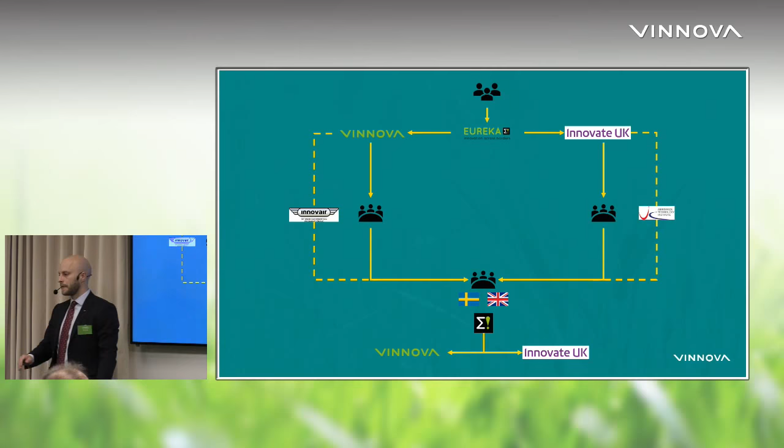So on the Innovate UK side, once you've completed and been through Eureka label, there is nothing further in terms of application to do with us. The independent assessment will be done on the Eureka application form only. The extra documentation the UK is asking for is purely for the strategic assessment by ATI, and there's a line not shown here which is value for money, assessed by our sponsoring department, the Department for Business, Energy and Industrial Strategy, BEIS.

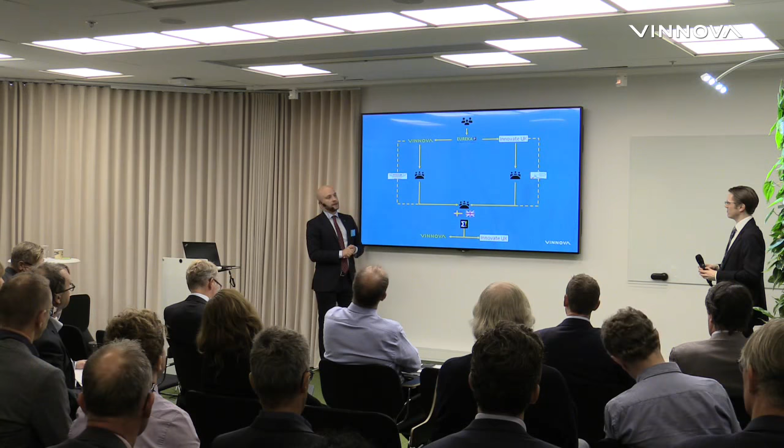Yes, so for Vinnova there's an extra step after the labeling. That's when you have to register and do the application to Sweden. But that's basically just submitting the Eureka project proposal, and then we will deal with it over here.

Here's another slide with the same information. Worth noting is that we will use the Eureka methodology for assessing the applications, so we will use the same method on both the Swedish side and the UK expert panels.

And the question you've been wondering: what is a Eureka label? It basically means that we bring the applications that have come out of this process to the Eureka high level group, and they will endorse these projects. That's the way it works.

Crystal clear. There was a lot of information, and I'm sure we will find a way to put the slides on the web pages for those of you who couldn't follow all the details. But I also heard there is a 1.5 hour YouTube clip of Justin explaining everything, and I expect Lars and Peter will do the same recording in Swedish. One day, I'm very much looking forward to that.

I think we hope we have time for some questions here of a more general character that could also be interesting for the people watching on our web broadcast. Then we will have a 5 or maybe 10 minute break to get some fresh air, change the technology for the presentations from the companies after this, and we will continue. But are there any more questions so far?

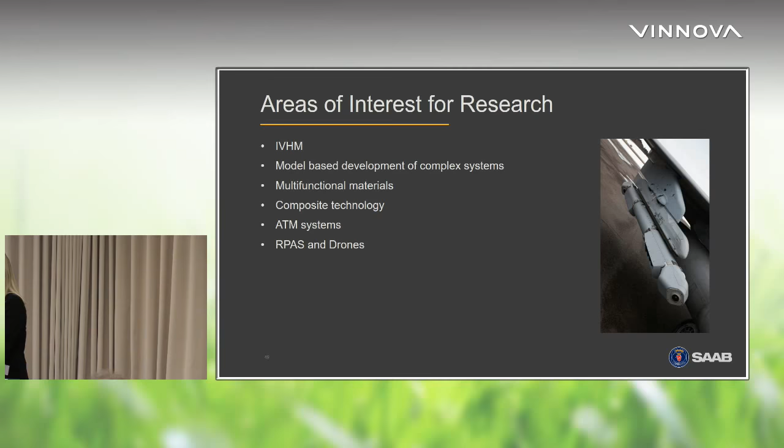I have a favorite expression when I talk about innovation: R&D is taking money and turning it into knowledge, and innovation is taking knowledge and turning it into business. So what I hope for this call and the activities we're doing today is that we'll come up with really interesting new technology, but also take it to other applications.

I also hope this might spin off—we talked about Saab the car, we talked about spin-offs earlier. But also maybe it can encourage some STEM research and some of our younger teenagers to be excited about aeronautics, because personally I'm quite excited about aeronautics. So that was a bit of it.

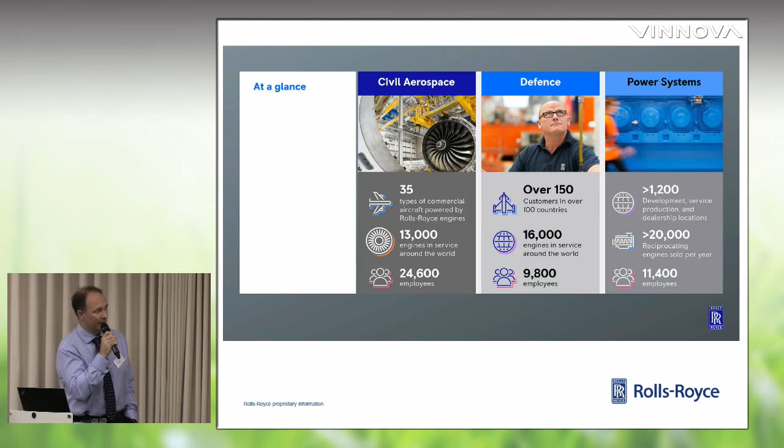And then in the defence markets, we have over 150 customers, significant numbers of in-service engines, and also just under 10,000 employees. Our power systems division equally has a significant footprint as well.

So civil aerospace is our biggest business, just over half our turnover there, at just over £6 billion. It's huge, as you can see, this big engine being tested. This is our lifeblood of where I come from in Derby. It's a significant investment in the region, as well as other investments around the UK and globally.

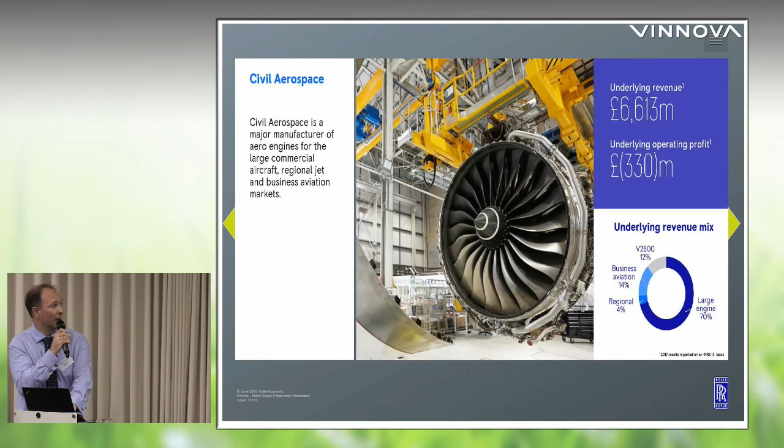In defence, we also have significant investment, and also in power systems as well. So we have around 50,000 employees globally, and around just over a third of those employees are engineers. So we heavily support our engineering development within our company.

We heavily support the education of engineers globally as well. We have significant numbers of apprenticeships, 750 apprenticeship schemes. And we're really keen to get out there into our various communities to support engineering and develop the engineers of the future as well. We have operations in over 50 countries globally.

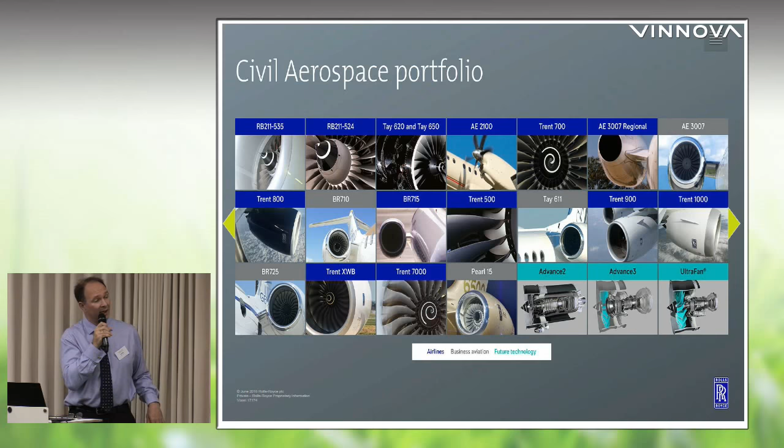We have an approach to technology we call our vision approach, where we look at technologies in the next 5 years and then the next 10 years. The next 5 years would be some of the technologies I just mentioned in terms of the Ultrafan. The next 10 years would be things in terms of the initial electrification market. In the next 20 years, even more radical ideas, like the plane design at the end, the blended wing, as we call it.

So these are some of the technology portfolio areas we are supporting in terms of architecture and design. We're looking at technologies that advance our core for emissions, which is key in the aerospace industry as we increase the number of aircraft in service and the fuel burn. We've got to look at better solutions that reduce fuel burn, particulates, NOx and CO2. So we've got projects working on lean burn. I've mentioned Ultrafan already. We're looking at how we do some of our digital design in the virtual engine, and we also have technologies around our engine core as well.

We work quite closely with our catapult centres in terms of manufacture, in terms of advancing general manufacture as well. We're also involved in ALM, and in specialist turbine manufacture to improve our capability in our hot core. To do some of this, we have a very large materials department, and we work with lots of academics and our catapult centres in terms of advancing the alloys we require and new varieties of those alloys required in our engine design.

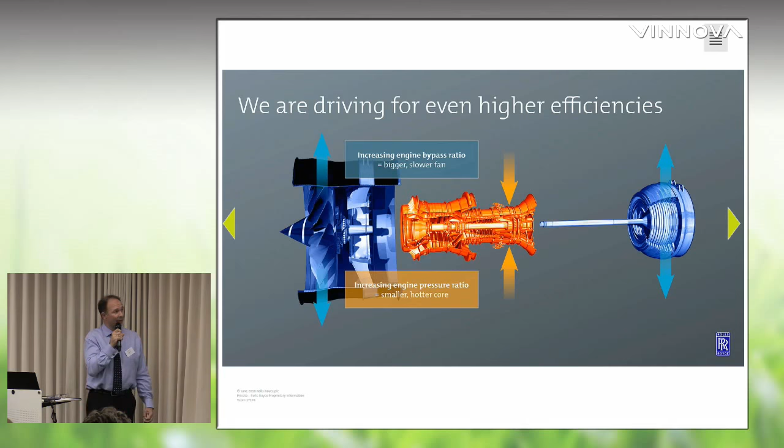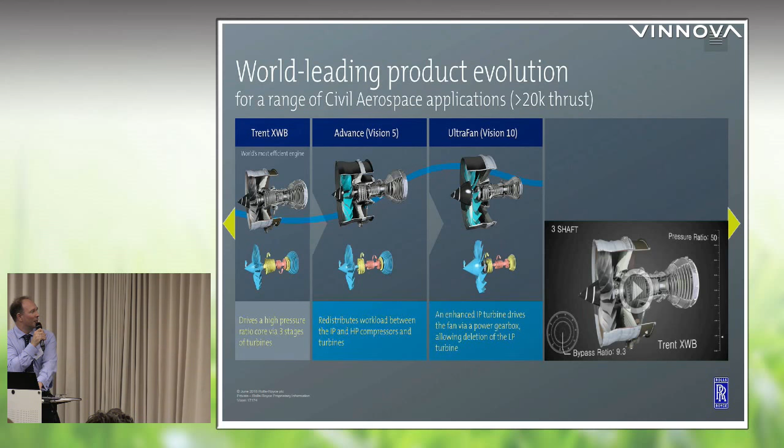This is just really reiterating what I've said, so I'm going to quickly skip on for the purposes of time. I've already talked about our evolution from 5 to 10 years.

In terms of where we're located, in a number of areas around the world, also with our network of partner organisations. This is why it's really key today, and I'm really pleased to see so many of you here today. We can't do all this on our own. We need partners, and so we're always keen to look at who we can actually partner with.

We were quite lucky to set up a concept that we call our UTCs, our University Technology Centres. We have around 19 in the UK, but also global locations. These are great because some organisations have direct educational centres, and we found that linking with key universities has been really beneficial in terms of their specialist expertise. We almost certainly partner with some of these organisations in a lot of our technology projects.

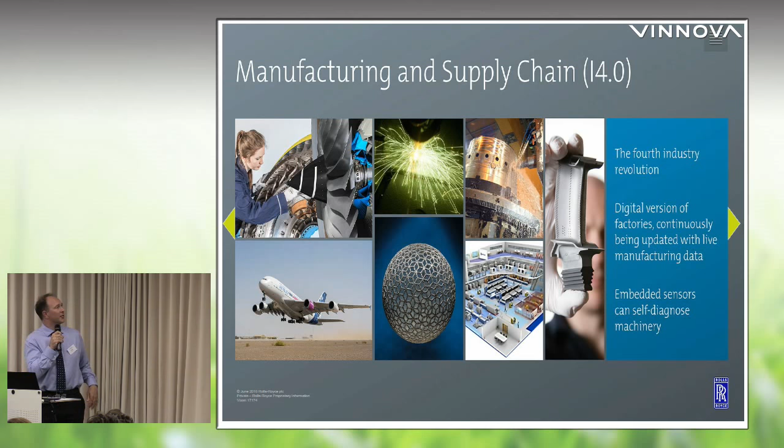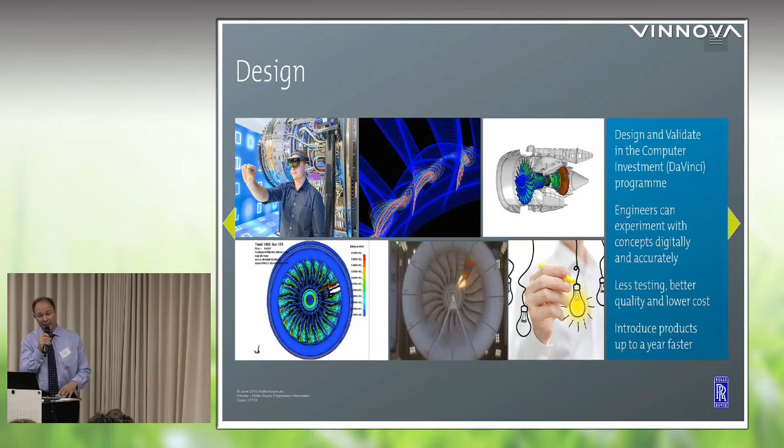Most of you will have heard of Industry 4.0, so this is part of the digital linkage into our manufacturing and supply chain. We're also key in terms of looking at high value design, and we have various departments both in the UK and Germany particularly, where we're looking at improving the way we design engines in a digital capacity. There are lots of techniques and a number of projects supported from various institutes at the moment.

Moving on to some of the last slides, this is our evolution of propulsion. Today we have in service the Trent XWB on the A350 as our current in-service engine. We are testing currently our advanced engine, and then we're moving into our UltraFan engine with its biggest ever diameter and power gearbox. We'll then be looking at a variable pitch UltraFan to even improve the efficiency. And as we start going into the future, we've started engaging on hybrid electric engines as well, to look at fuel efficiencies in terms of acceleration and deceleration of aircraft during flight.

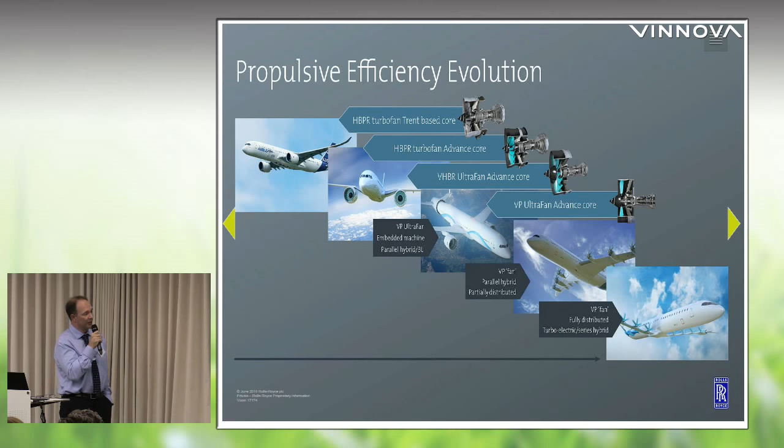And then as we get to full electric opportunities, you can see the model at the end. These are some of the things we're looking at, and I mentioned that we're also interested in doing some full electric test flights for limited numbers of passengers at the moment. So we have a lot of technology that's going forward into the future.

So through this call, what are we looking to do? We really wish to collaborate. We cannot do all this on our own, and our drive is to work with not just national but global organisations, both at our catapult centres, universities, SMEs, and other industrial organisations. Today we work with all those organisations. In terms of our linkage to Sweden, we're quite heavily partnered with GKN on our UltraFan programme.

We also have other collaborations that exist today, and I've given a couple of examples. We work with Chalmers University of Technology and have done some work with them in fuel pumping. We're also involved, when you get down to the smaller elements of our control system, in harsh environment electronics with a company called Ascatron. So we're keen to look for many opportunities that exist here in Sweden, and looking for collaborative opportunities that can help us on our technology journey.

I think that's all I have.

Okay, thank you very much, and thanks for that, Greg. Thank you for coming here to Stockholm and telling us about your visions. I really hope you will find some new opportunities through this call and more collaborations with Sweden. I'm sure there are lots of companies and researchers keen on working together with you and Rolls-Royce in developing this. And I think electric aircraft is visionary too - be interesting to see, that's really in the future.

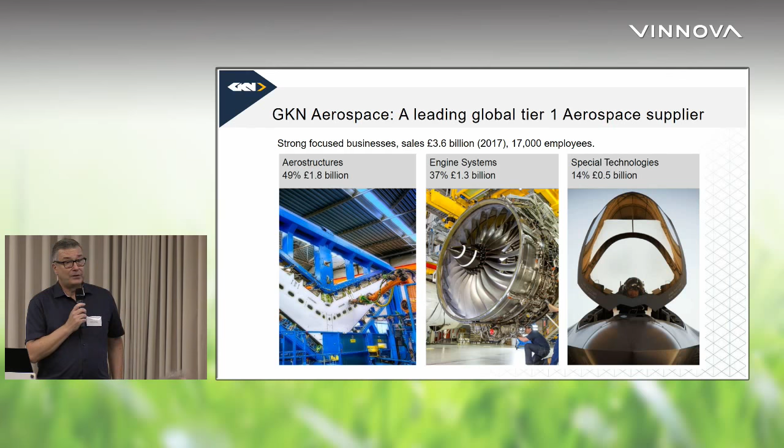So I'll talk about the engine systems division then first, or mainly for all of my presentation today. The headquarters of the global engine systems division is in Trollhättan, Sweden. We have 12 different sites in exotic locations such as India and Norway, but the majority of the sites are in the US. About 2,400 employees in Sweden, and maybe some people remember that way back in history, before 2012, we were called Volvo Aero, and before that Volvo Flygmotor and other things from way back to the 1930s.

We are active in the military area. We are, in fact, OEM responsible for the RM12 engine for the current Gripen aircraft. We also have a space propulsion division developing supersonic turbines driving the fuel pump for the Ariane rocket, and also the exhaust nozzle for the big main engine. But I'll talk mainly about the civil side today, the commercial engine side.

And the nice picture you see there, it's not actually a GKN engine. We don't have our own civil engines, but it's not a marketing cartoon - it's actually a virtual engine printout. So thanks to our heritage and whole engine competence from the military side, we can actually do a full engine model and use that as a virtual engine to assess all the technologies we develop. So it's a good example of synergies between the military and civil side.

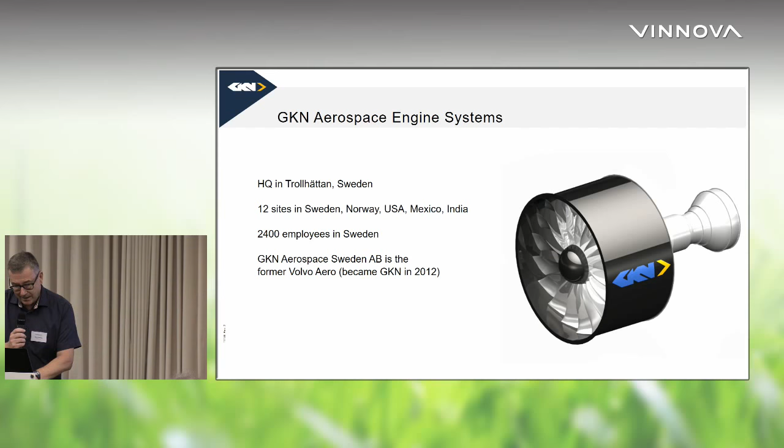We have a strategy, or a component specialization or module specialization if you want, working on four distinct areas of the aero engine: rotating parts in the fan, static parts in the fan, the low pressure compressor or booster, and static parts near the exit of the engine. We call this our 4-module strategy.

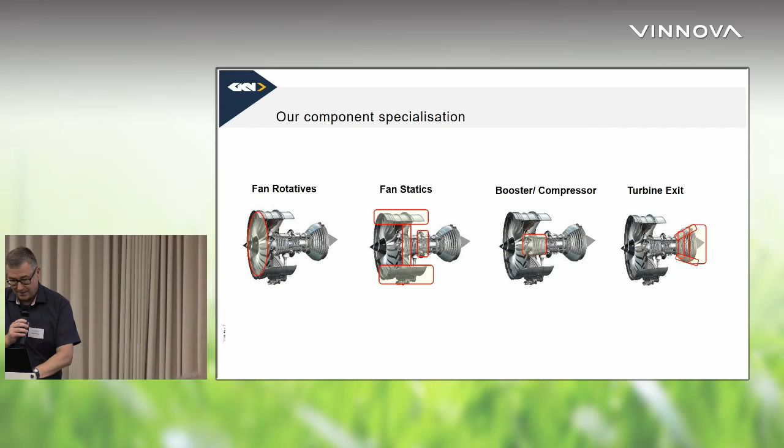It's been quite a successful strategy because we have been able to do business with all the engine OEMs. So today we are involved in more than 90% of all large commercial engines worldwide, not only with Rolls-Royce but with some of the competitors as well. But that means that we can be efficient for companies like Rolls-Royce, having bigger volumes and so on.

Looking at Rolls-Royce, I've just taken some examples of engine programs where we are partners, like typically around the part called the intermediate compressor case, which is a very complex structural part sitting in the middle of the engine. It interfaces with absolutely everyone, so we have to be very flexible, like Swedish people normally are, and talk to everyone.

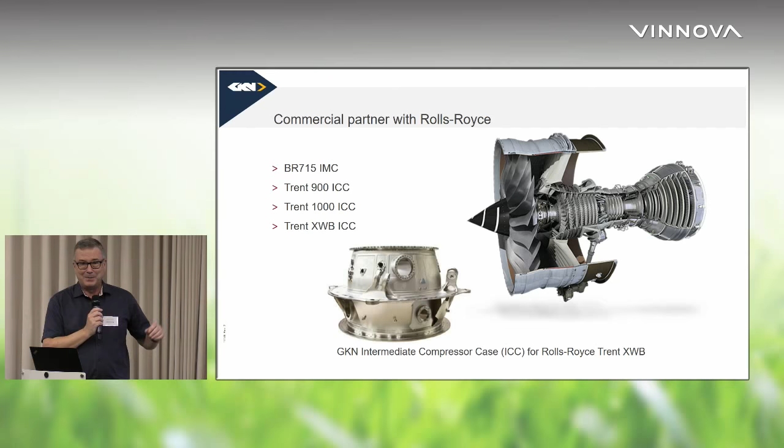As Greg said, we are also partnering in the UltraFan demonstrator in Clean Sky. So we are what's called a core partner in Clean Sky 2, which means that we are a strategic partner from day one to the end of the project.

Also in Clean Sky, it's not only with Rolls-Royce, we are also on some other engines. And as a core partner, we can also launch our own calls for proposals to bring in new partners, which we have done with several UK partners, in fact, by chance, because it's a free competition. But they are good.

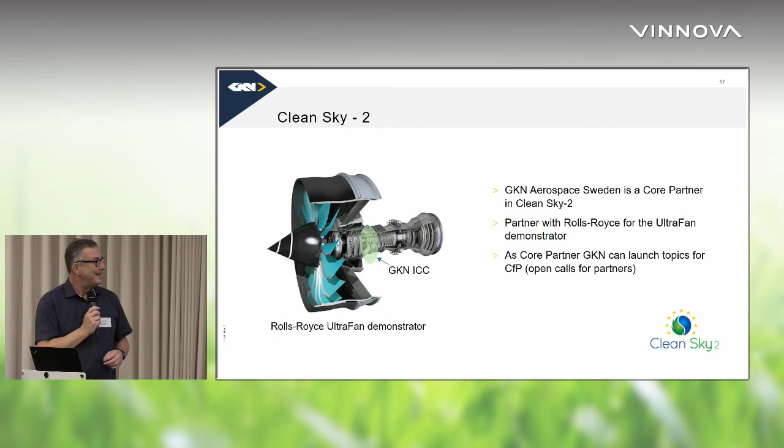So I wanted to mention a couple of other entities in the UK that we are working with or have been working with. Just examples, not an exhaustive list, but we work with universities such as Loughborough and Oxford University, Nottingham, the Catapult Centres, AMRC in Sheffield, MTC in Coventry, the Welding Institute. I'm not sure if that's a Catapult, but maybe not, but it's good anyway.

So what do we want to do in the call? Well, we hope to be able to expand our collaboration with Rolls-Royce. We really like to work more with the Catapult Centres and also the highly skilled universities. Some of them are centres of excellence for Rolls-Royce, I think, as well.

But not only these, we also have supply chain companies in the UK, our supply chain, where we can get things like fiber fabrics for composites, castings, forgings, new alloys. So we are trying to set up some collaboration in that area as well, and looking also at SMEs.

And on the Swedish side, we want to involve what I wrote as Swerea Research - maybe you're called RISE Research Institutes now, I don't know - but at least we want to work with the research institutes in these projects, and also bring along some of our university partners like Chalmers, University West, KTH, Luleå.

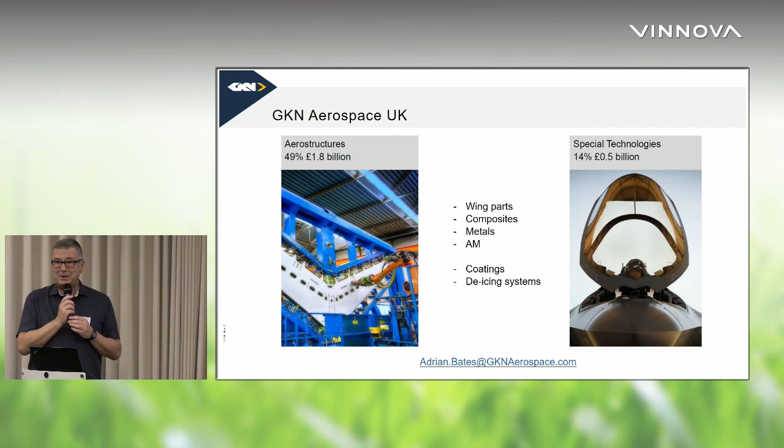On the special technology side, there are things like smart coatings in facility in Luton, de-icing systems. So if you want to be in contact with them, send an email to me or Adrian Bates and see what we can come up with. Okay, thank you.

Thank you, Robert, and great that you could present both GKN UK and Sweden. And as we said, GKN is an important partner in this call, and as Justin and Lars explained, you count as a company partner, and there's this little bit special rule: you can't have a project with just GKN UK and GKN Sweden. You need some other companies as well to get this true collaboration.

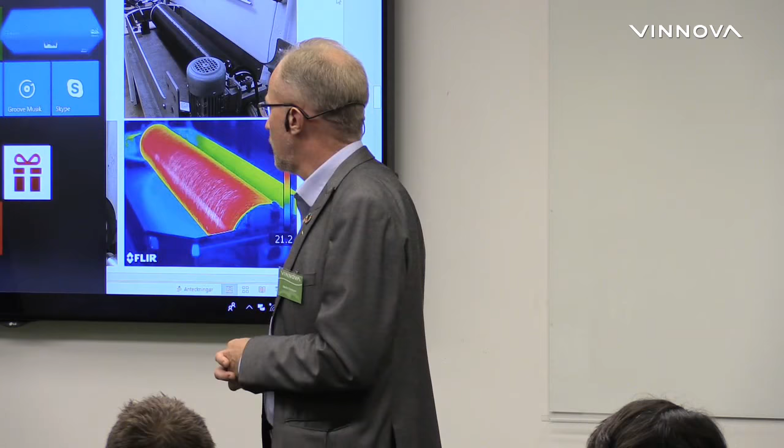But it's really exciting to see the way that you drive this collaboration forward. But there's not only big companies in this. We hear Saab, GKN quite a lot here in Sweden, and Rolls-Royce. But what we've seen is really important is also the small, medium-sized companies that are really crucial in this collaboration, that often bring forward the new ideas, and use the big companies kind of as an engine to make them into reality. So one of these companies is Corebon, and we will hear some more about it from Tobias.

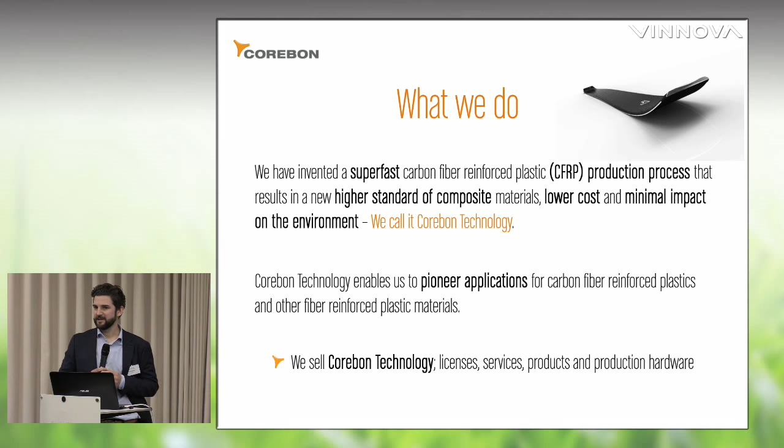We realized quite early that we needed some help to fully explore our technology. So our strategy is to license our technology and also work with universities and research institutes. We've been working, for instance, with Swerea, RISE, and also with the AMRC in the UK. We recently opened Corebon Limited. It's not a great office like Rolls-Royce or Saab, but we employ 3 people in the UK to take care of this collaboration. We have a couple of projects running, which I'll get into a little bit later.

So what's the big deal about the quality in our composite? We were able to reach a really high fiber volume, between 70 and 86%. That means we have less matrix in the composites and more fibers, which brings out the best of the composites in physical properties, such as heat conductivity and electrical conductivity, etc.

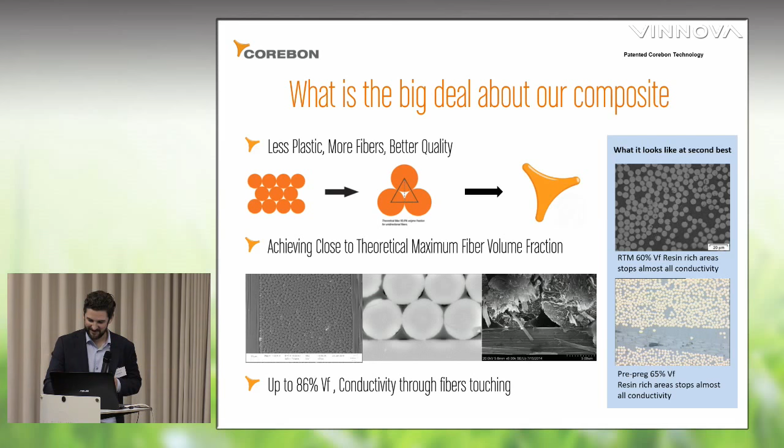Our induction heating technology heats volumetrically, in situ, so we heat the carbon fiber itself directly. We can also control the heating, starting from the center and going out, or from one side to the other, so we can control viscosity and different production processes. A lot of the production processes for CFRP are dependent on heat, so that's what we've been doing.

We also discovered there were no frequency inverters or production equipment for induction heating of semiconductors that were good enough for our purpose. So luckily some of my colleagues developed new frequency inverters and power electronics to suit these difficult-to-heat materials. We typically reach 1/10 of the production time, so we have really fast throughputs, and we save up to 95% of the energy, which is important for environmental reasons as well.

I'm not going to talk too much, I have some videos here which will show different projects we've been running in qualification. The first one is a pressure vessel for hydrogen, type 4, for trucks. Then we have in-mold heating, induction welding and consolidation for thermoplastic and semi-crystalline CFRP. We also make products beyond just processing CFRP, like induction heated rollers, plates, molds, etc.

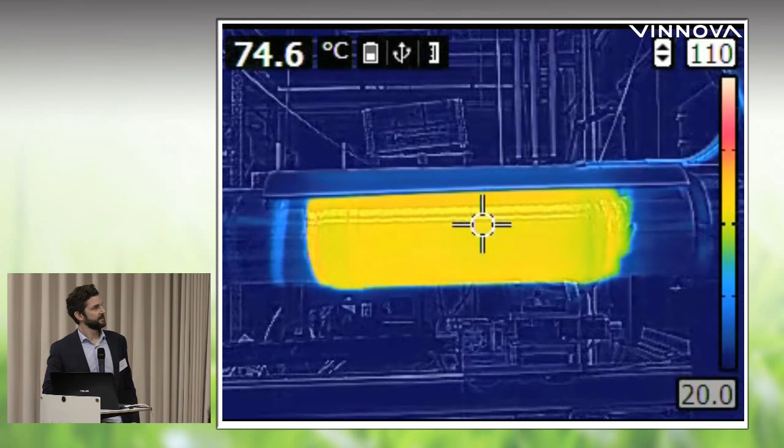This is a video of filament winding with induction heating. We use regular steel mandrels, but we heat just the fiber and the surface of the metal to save energy. This is an example of induction heating welding, where we control the heat. We're quite good at designing inductors, so we have a lot of patents in this area.

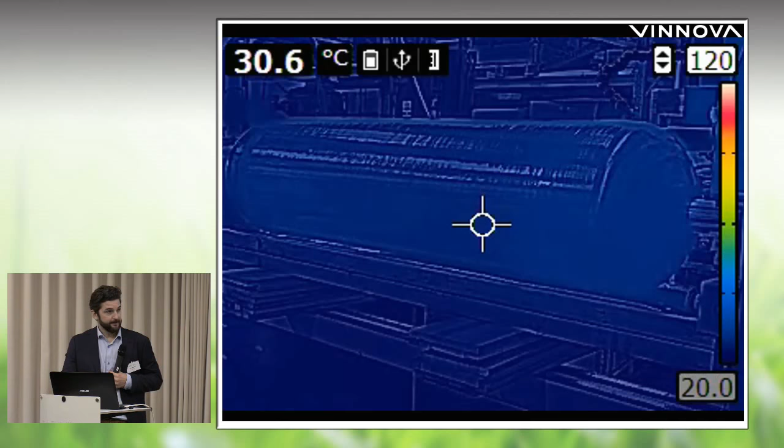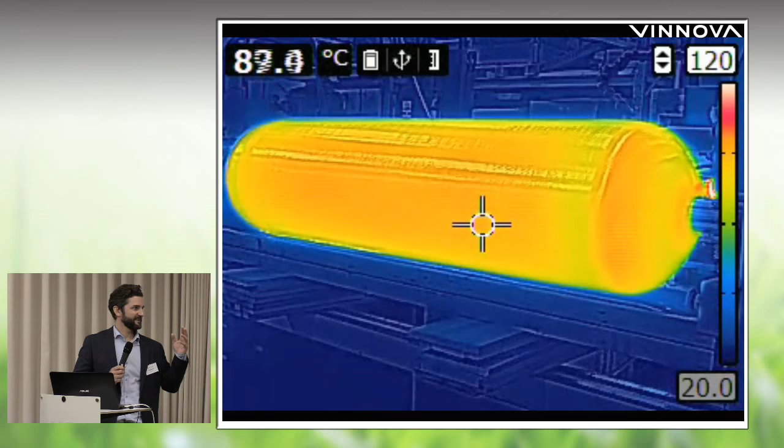This is a pressure vessel with multiple materials and several very different layers and directions, so it's really difficult to heat.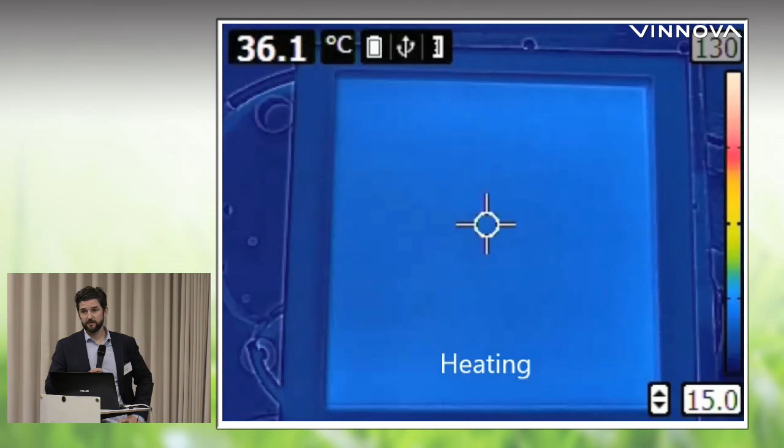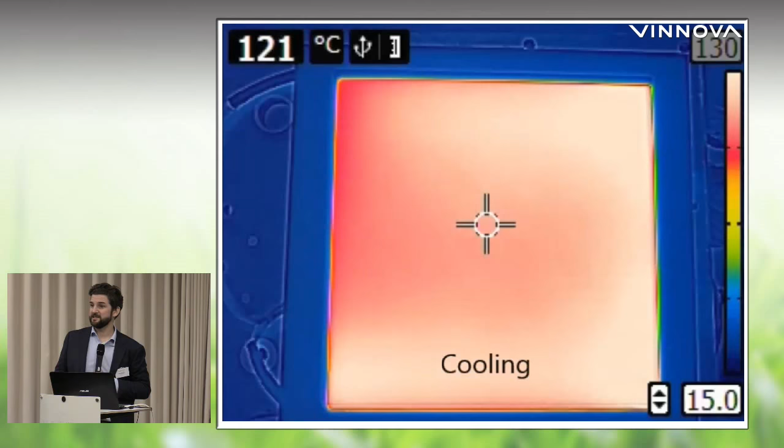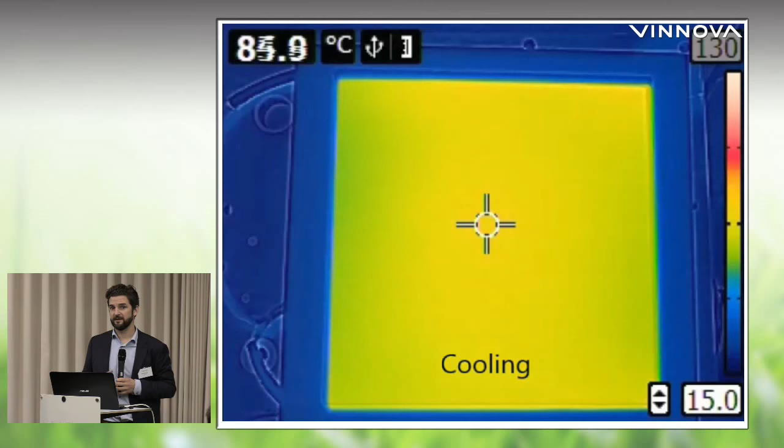An example of in-mold heating, representing an RTM mold or compression molding, where we heat to 123 degrees Celsius, as you can see on the side there, and then cool it off again. So we can reach very fast production speeds. We're currently running projects of up to 8,000 RTM parts a month, and we're increasing that to twice that speed next year.

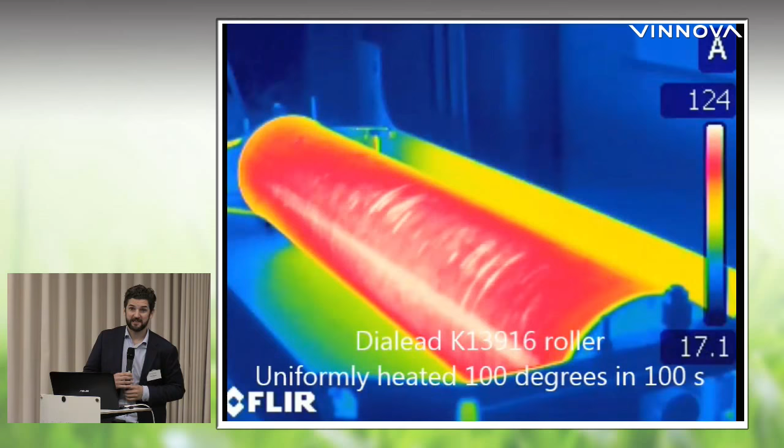Induction heated rollers can be used for different applications. In this case it's for the packaging industry. Being placed close to Lund, it's not very strange. This is what it typically looks like, with induction heating in the center.

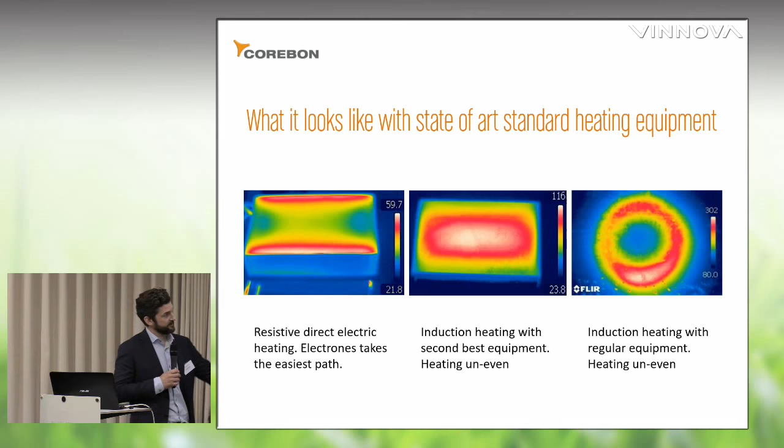This is very good induction heating for metal, like what you'd have on your stove at home if you have an induction heating stove—this is the heat pattern it generates. This is what happens with resistive heating: it takes the fastest path and heats the edges typically. Compare that to what we achieve, where we can heat all the way out to the corners through the whole material at the same time, and also control the heating. You can imagine there are a lot of different processes that would benefit from this.

And we're looking for partners to be able to explore these benefits, of course.

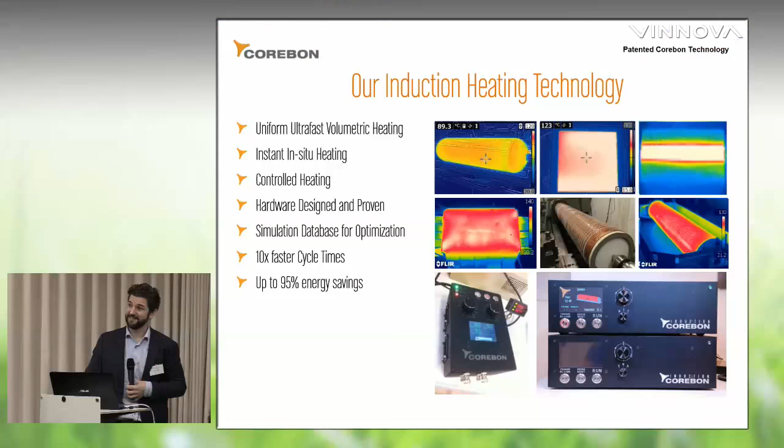So these properties have led to some products that we produce. We wanted to show that we could produce in larger quantities and qualify the technology. The thermal conductivity, due to the high fiber volume, lets us produce heat exchangers, and we're currently scaling that up with a large heat exchanger manufacturer in southern Sweden.

Electrical conductivity means that we can induction heat molds, rollers, plates for different industrial applications. We're looking for partners in all these areas, both in research and application and qualification of the technology.

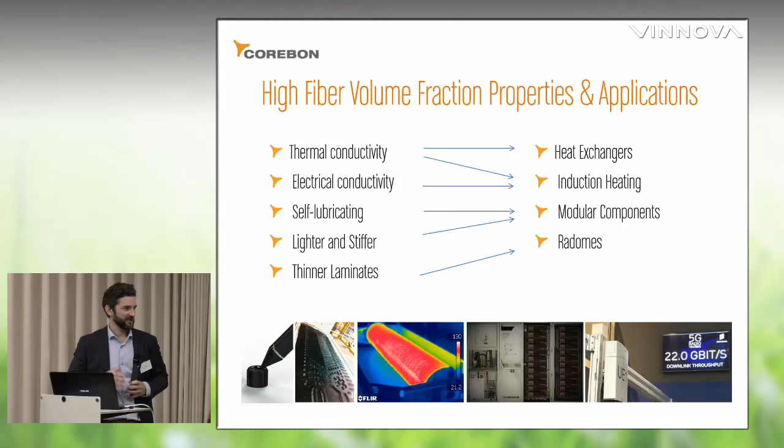With heating from the inside, as we can control the fiber volume and injection flows and processes, we're able to make super thin laminates. So actually our largest product at the moment is radomes, high frequency radomes for the new 5G systems. There are some images down below, radomes with 22 gigabit throughput, so you can push a lot of data through our radomes.

And what can we heat then? If it contains an electrically conductive material, we can heat it pretty much, even really difficult materials, and even if it's really low in fiber volume, such as sheet molding compounds.

Compression molding, RTM, autoclave. We want to use the autoclaves better, not always talk about out of autoclave technology, but maybe use the existing autoclaves in a more efficient fashion. Don't heat the whole autoclave, heat the part. Pultrusion, filament winding - we've been running proof of concepts and qualification projects for about 6-7 years, and we have succeeded in quite a few areas, with lately much help from Swerea SICOMP and AMRC, etc.

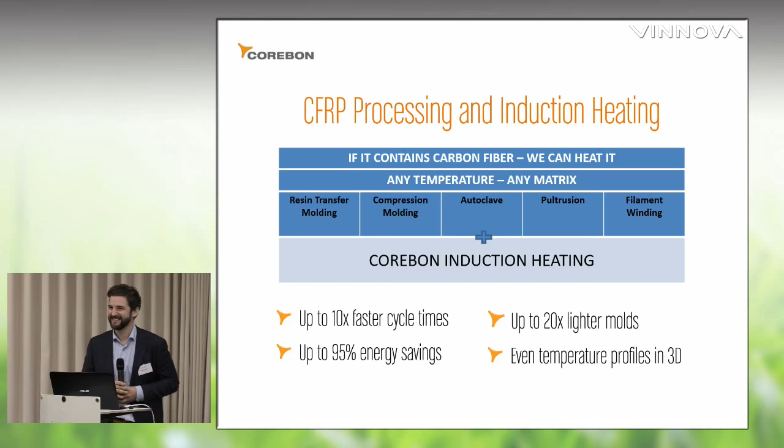So, it's faster. We make lighter molds since we can heat uniformly. We can make light, thin molds. We don't need the big thermal mass to even out the temperature, since we can heat with a uniform heating pattern - steel molds, carbon molds, all types of molds actually. So we tried a lot of different processing.

An example of a product we make is heat exchangers, induction heated rollers. We produce the first part, and then we have partners producing the inductors for the molds, etc. So we don't produce all of the power electronics and frequency inverters - we just developed it, and then we have partners subcontracted.

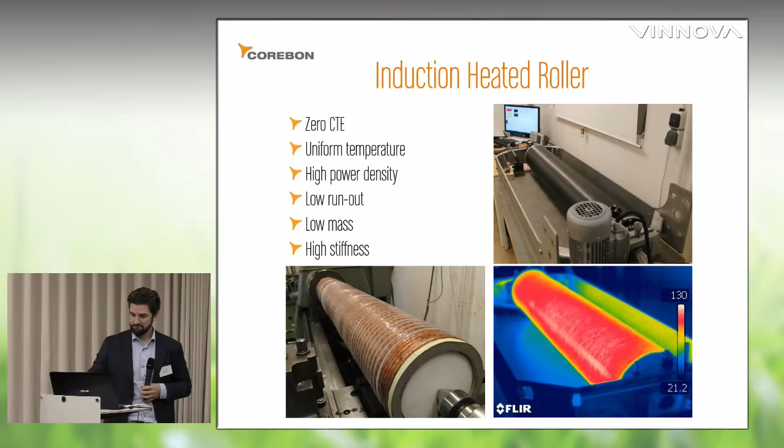I talked a bit about modular components, so we are making a lot of projects for robotics and suspension of cars, etc. Also how to fix the parts together modularly, something that we developed and have some patents in. Altogether now we have 9 patents, and I think we have 5 or 6 more coming in these fields.

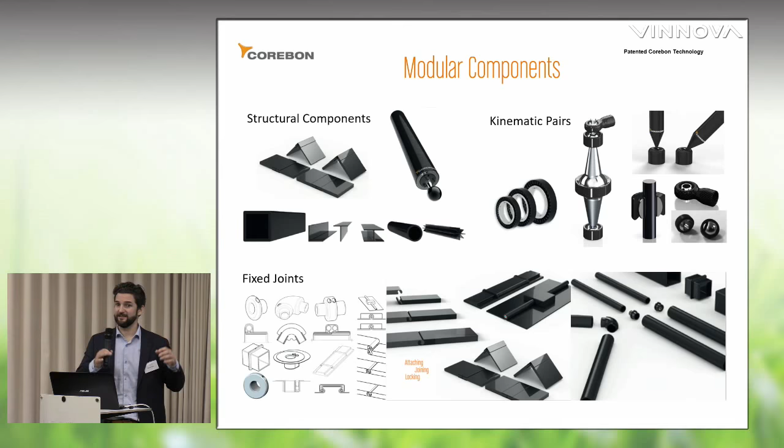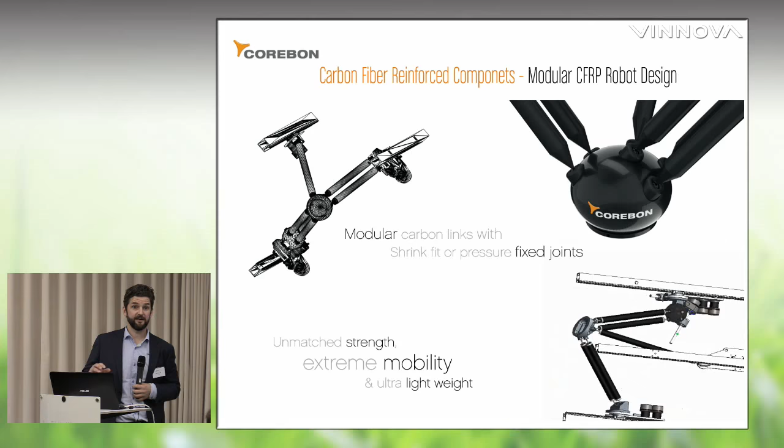An example of the robots that we're building - we own 1/3 of the Swedish robot consortium. It's actually starting this month, together with Prodtex and Cognibotics, which is sprung out of the robotics lab in Lund, and Prodtex from Chalmers, I believe, from the beginning. They do implementation of robotics in the UK, for instance, where we have robots at the AMRC, the factory of the future.

We're also working on fixtures together with Prodtex. I believe it was the LOCOMACHS project to begin with, where we're making the fixtures lighter, stiffer. We're utilizing the ball joints and components that we developed for robotics, and we now found a nice application for it. Hopefully we will reach all the demands of the aircraft industry.

So, consortium building. We're too small, so we need to find partners always. Talking about partners, we are partnered with Sumitomo and Mitsubishi who are making the fibers, also in marketing and sales - they're promoting our technology, helping us in application projects. Scania recently invested in Corebon, which was thankful because we're going really fast, so we sort of have the hockey stick not in front of us, it's right in our face, so we needed some help.

And then we have had lots of help from Evonik, ETC, EMS, which are making centrifuges for nuclear fuel, etc., and MEC, so to make the filament winding in our products.

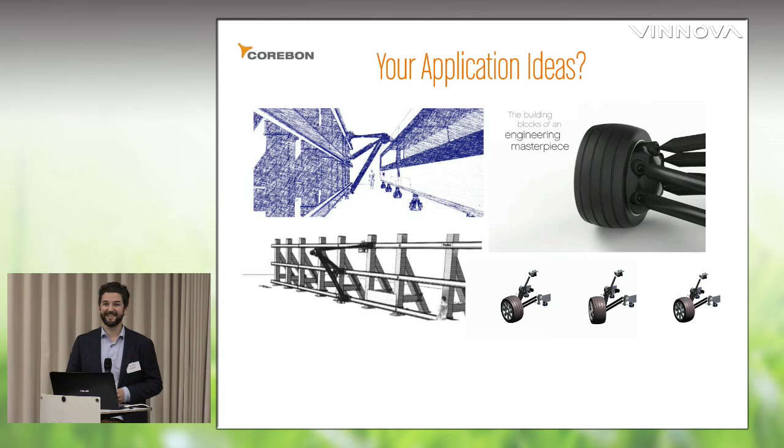I'm sure many people got ideas for how they can use your technology in many different fields, and I think it's also a good example of how these ideas from universities and academia can grow into smaller companies, and those smaller companies can quite rapidly grow if they find the right people to work with.

Of course, yes. Thank you. Yes. Thank you, Tobias.

It's very nice for us also to see the examples of all the companies that we support in different early stages. Not all of them are quite as successful, but that's the risk we have to take, and that is really our role, to take risks and step in with some kind of subsidies where it's actually needed. If we just put the money where there's no risk, then there was no big point to have us here.

One of the institutes Tobias mentioned was Swerea, and Swerea is a very good example of the institutes we have here in Sweden that are really between academia and industry, and it's very important to help small companies meet academia. So Marie, please tell us more about Swerea.

Yes, I'm actually not going to talk at all about Swerea. No, but you can just talk about how you work. Yes. My name is Marie Jonsson.

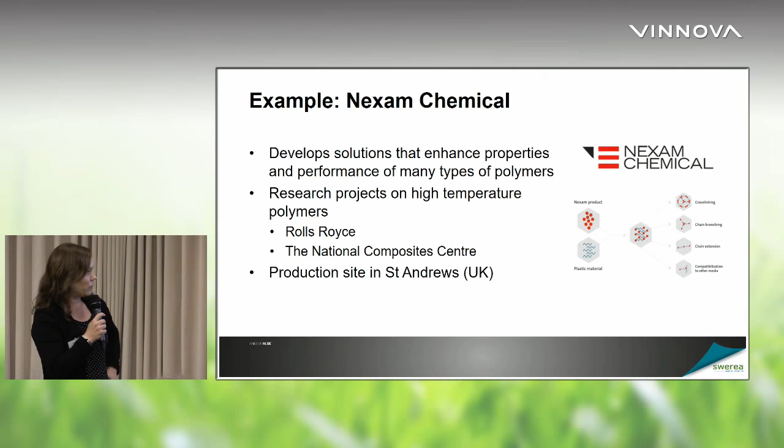I will hold my presentation a bit brief. As I said, in 2016, when we went over there, we identified that there was a need for bilateral funding, easy access to this in order to help the SMEs building new projects. So this is happening today, which is very good. There is collaboration and development happening already together with the UK, but this will be further strengthened now, we think. So that was all from me. Thank you.

I think you can be very helpful in setting up and facilitating some of these collaborations, and you can also help a little bit later in the break to find connections and collaborations.

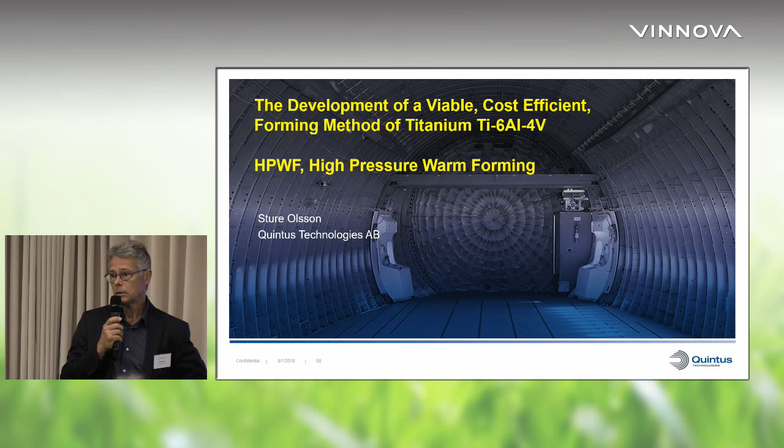We do two things. One is densification of metal, for example in the aerospace industry, typically castings. We call this hot isostatic pressing, or HIP. So hipping of castings is done in our equipment.

When I say Quintus Technologies, think ABB - we were part of the ABB organization until the late 90s, and since then we've had financial owners, being on our own for nearly 20 years. It's been a fantastic ride, and the company has grown. We've also had different brand names - Quintus for the last 1.5 years, before that Avure Technologies, Flow International, ABB, and ASEA before that. So if you're familiar with hipping, you may also be familiar with these different brands.

The other side of the coin is metal forming. We provide equipment that contains high pressure to form sheet metal.

If I look at our customer base here in Sweden - Saab, GKN, yes. In the UK - Rolls-Royce, yes. Also companies like GKN in the UK, yes. British Aerospace, Bombardier - all the major aerospace companies are customers of ours. We are an equipment provider.

Being an equipment provider, we take pride in understanding not only how to engineer and manufacture the equipment, but also in understanding the customer process. This means we have people in our application center in Sweden following very carefully what happens with the material you want to form or densify.

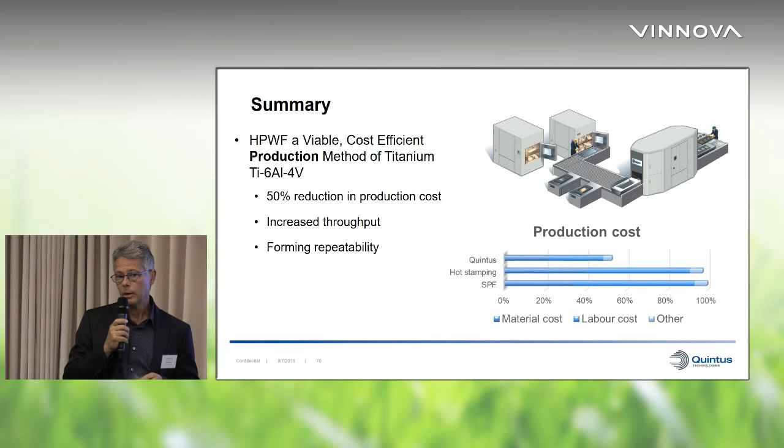Our export from Sweden accounts for, I would say, 98% of what we do. The UK is a very important market to us, and for that purpose we already do a lot of collaboration. As you can see on this slide, we collaborate with, for example, the AFRC in Glasgow, UK.

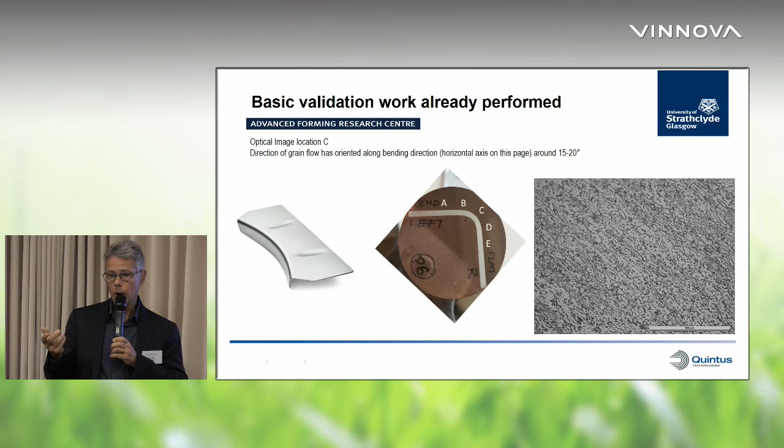They've done some initial tests, very interesting if you want to dive into the details. But what we're looking for now is the next phase. We'd like to see collaboration between institutes to gain more data and understanding of the whys and hows, but we also want to see collaboration with end users.

We are an equipment provider. We supply to, I would say, the workhorses for the fabrication of aircraft and engines, but not always directed to the OEM. Today you tend to have a longer supply chain, but the OEMs are important when it comes to spec setting. So we need to reach out to people at many levels in this process when introducing new technology.

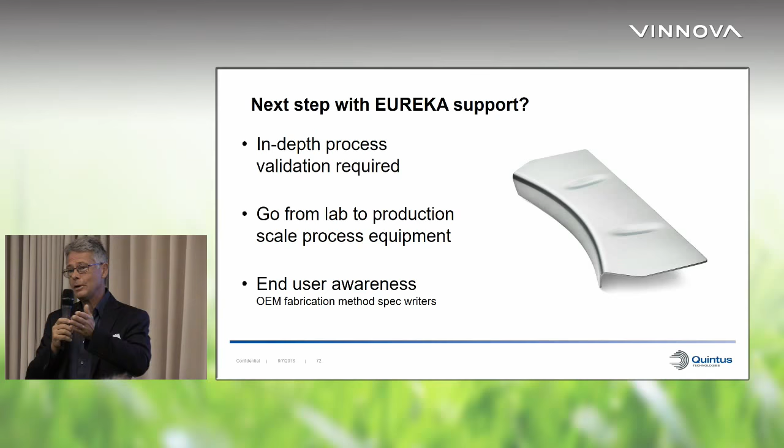That's also important in the project. So hopefully with this short presentation - I know it's very short - hopefully I've planted some seeds, hopefully we'll get some connections, and hopefully we can push this forward. Thank you very much, Sture.

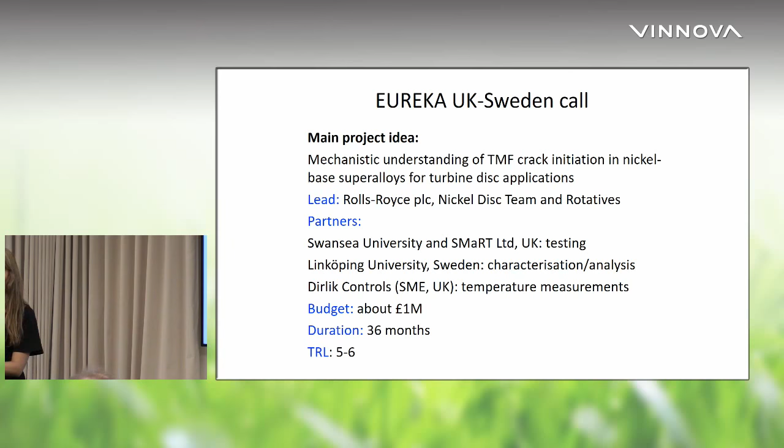Yes, I know, you got my list. You got it, but we need to discuss it. Okay, and then the other project idea. If you find something interesting, you are very welcome to contact me or Robert maybe.

Or Rolls-Royce. So we would like to look at effects of defects on various mechanical properties at high temperatures for turbine disk applications, but also for turbine blade applications. We would like to look at some manufacturing and the effect of defects after manufacturing on those mechanical properties.

We would like to do some modeling and prediction work of these properties, and we do it with Rolls-Royce now. We would like to look at different phase angle effects during TMF crack initiation and growth, and the effect of different heat treatments on some phases and precipitates in turbine disc materials.

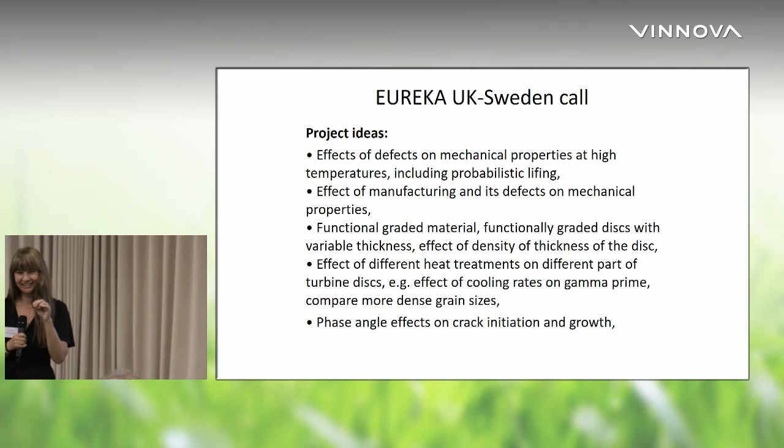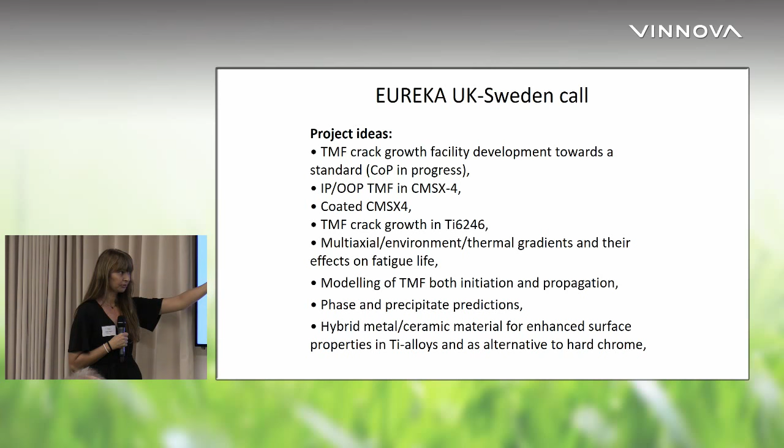I think I have to speed up because it's too much technical detail for you now. But okay, so we would like to look at coating CMSX4, at thermal gradients and the effect on fatigue life, and at modeling of TMF, both crack initiation and propagation.

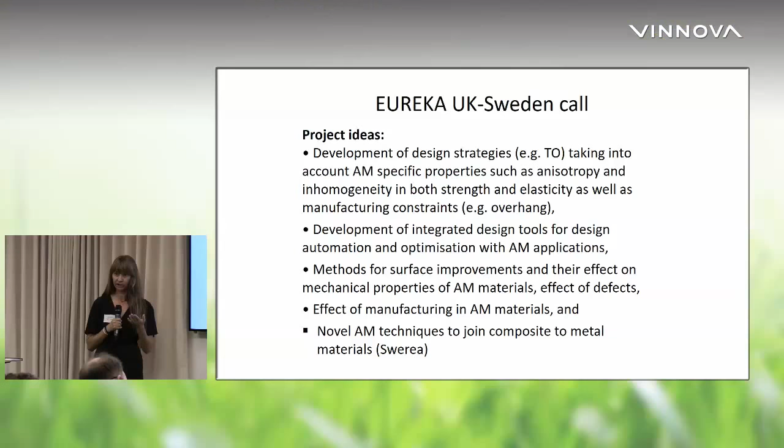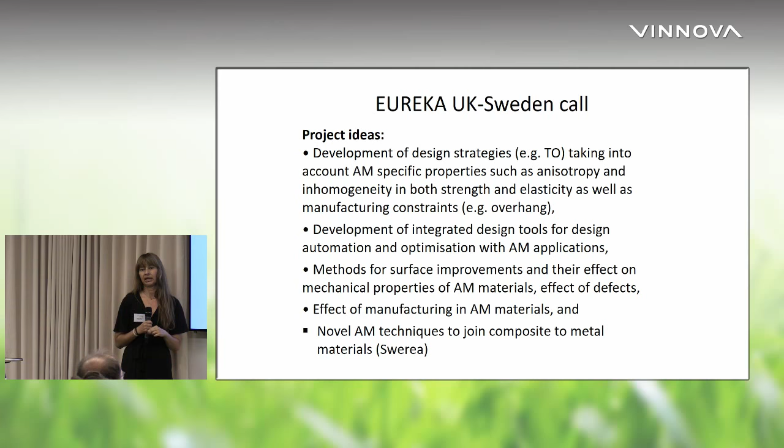But let me go to additive manufacturing. The second project, we focus on design, on topological optimization and design tools, and we would like to continue with that. But also we would like to look at the effect of manufacturing on these AM materials, especially the effect of as-built surface texture on fatigue performance, and the damage tolerance of these defects, and also prediction.

Okay, and this is the last slide. So yes, was it 3 minutes? Oh, 4 minutes, but it's okay. Perfect, I'm late. Thank you anyway.

Thank you, Svetlana, for that. It's almost, like it's Swerea actually. Sorry. Okay, thank you anyway, Svetlana, for this smorgasbord of project ideas, and I hope you will find somebody. I'm sure you will find some people who like to taste more of what you presented. So let's quickly move on to the next one. Swerea? Yeah, it will be short, I promise. 3 minutes is a long time.

So my name is Mats Werke, and I'm working at the Department for Component Manufacturing at Swerea IVF in Gothenburg. And we have an idea for a project concerning minimization of machining distortions. It's a very common problem at many companies, and also in the aerospace industry, both GKN and Saab.

One problem is when you remove material during machining, residual stresses release from the component and cause it to deform out of tolerance if you have bad luck. And that goes both for high strength materials like nickel-based alloys and also aluminum parts, for instance.

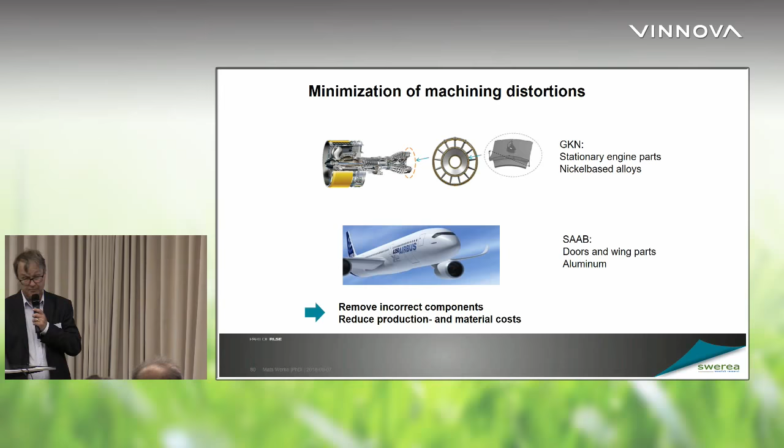So the aim of the project is to develop an optimization strategy, because you have to take into consideration the complete manufacturing chain, including forging, heat treatment, and machining. The strategy will be based on tests, measurements, and simulation. And the aim is to come up with a strategy to adjust process parameters and also workpiece geometry.

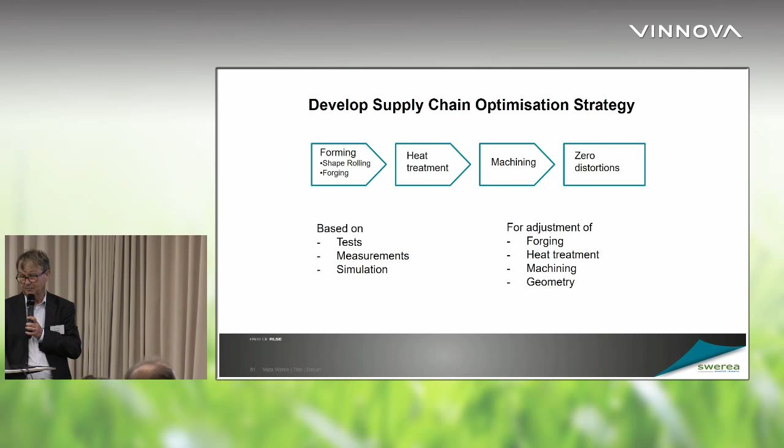For now, we have an ongoing discussion with partners in Sweden: GKN in Trollhättan, also Saab, and Brogren Industries, who is a supplier to GKN. And in the UK, our main contact point is the Advanced Forming Research Centre, outside Glasgow I think.

So we have weekly contact with them, and we discuss every Tuesday. So next Tuesday will be the next one.

There is also an SME in the UK that is interested - Wild Analysis Limited. They are the supporter of this simulation software called Deform. AFRC is the main contact point for Swedish-English companies, but I just promote the project here, and they're responsible for connecting with English companies. Maybe Rolls-Royce may also be interested in this area.

And it was exactly 3 minutes, so it was perfect. Who's up next - cryodynamics, Magnus? Hello everybody, can you hear me? Very good. Cryodynamics, I'm going to try to be in 3 minutes. Oh, I got a mail with 5 minutes, so I can maybe negotiate it - 4 minutes already.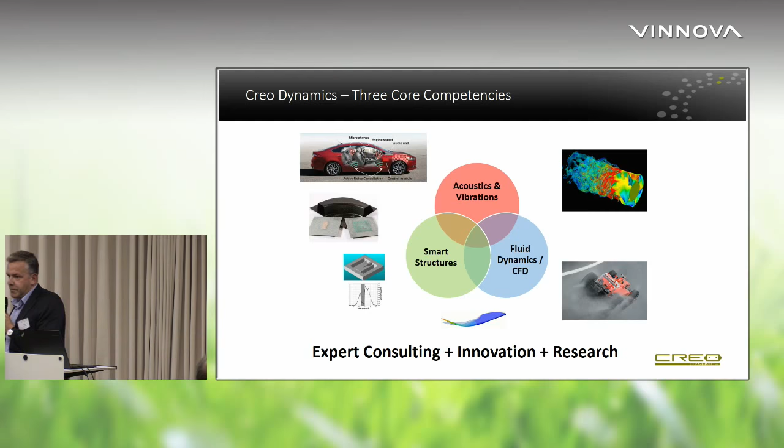And we work with smart structures or smart materials. One example is that in the cars of the future, there will not be any loudspeakers - it will be the panels in the cars that will be the speakers, so the driver's seat, for example, will become the subwoofer. These are things that we work with.

Looking at our partners and clients, we work globally - some of you are on this sheet. We have worked quite a lot with GKN, and of course obviously with Saab. Rolls-Royce is not there yet, I think, but I think we'll get there. About 40% of our business is with aerospace, about 40% is with automotive or the vehicle side, and about 15-20% is with other types of industry like turbines and so on.

We have 2 pitches. One project is a continuation of a project we have had together with GKN - that is what Marie talked about, the acousto-ultrasonic tomography. This is a very robust and easy to use method to look at defects in composites. What we need to do now, the next step, is to make it into an industrial product, and there we need a partner. We are doing some work with GKN, but we would like to broaden that partnership to other applications as well. It's a very straightforward method, which I like a lot.

Then we have the second pitch, and that is a metamaterial liner. This is an innovation that we have done by ourselves. It's about a liner material with microstructures that can be used as a noise trap - basically we can tune it, so it can be a tunable noise trap. Combined with the heat-resistant liner project we had in the Clean Sky project called Hostel a couple of years ago, we think this can take everything to a new level when it comes to noise reduction in the aerospace industry. Really, really interesting.

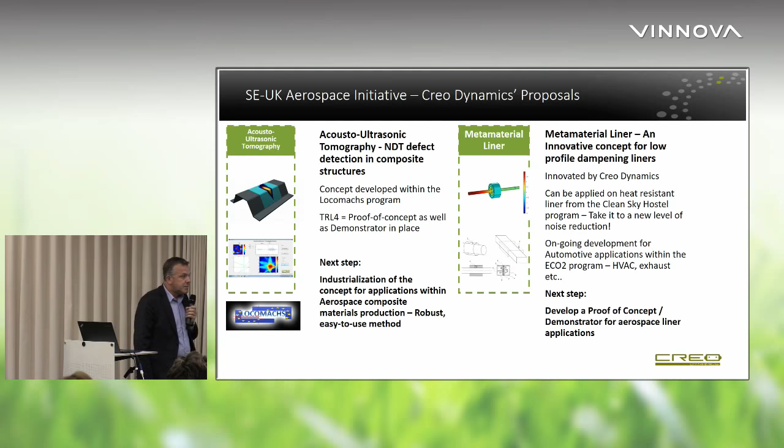But there we need help. We need to develop a proof of concept, we need to develop a demonstrator, we need to print out this material in 3D printing and find an application for how to do that. Here we need partners. I'll be here for lunch, so thank you.

And that was actually 4 minutes exactly, so no problem whatsoever. Don't rush. Good afternoon, ladies and gentlemen. I always forget the exact quotation, but I think Winston Churchill was asked how long he should talk. He said it doesn't matter, then I'll spend 5 minutes preparing. With us, we have 3 minutes, so we spend a little bit more preparing, but I shall try to stick to my 3 minutes.

My name is Dag Åsa, and I'm the operations manager of Spacemetric. And what we are trying to do is... just let me get my glasses.

I'm presenting a project outline for discussion from 3SDL and Spacemetric. This means that I'm trying to present our current thoughts. We're happy for input and we're far from fixed in our thinking.

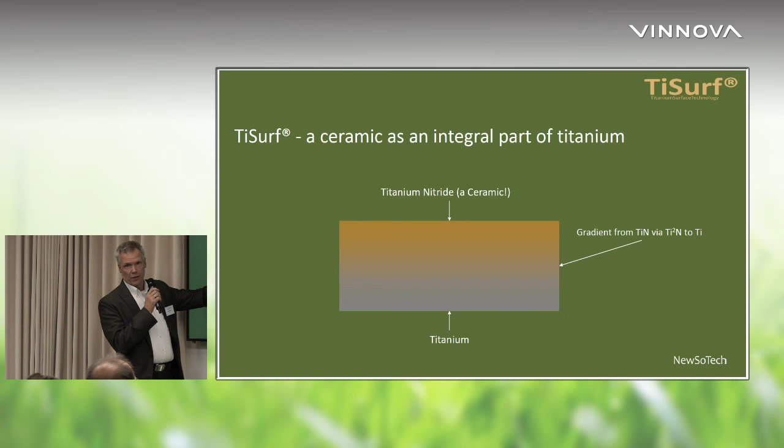The thing with this is that it's a Swedish invention since the early 90s, and the invention is that we physically grow a ceramic reaction layer on top of titanium. This means that I can bend ceramic.

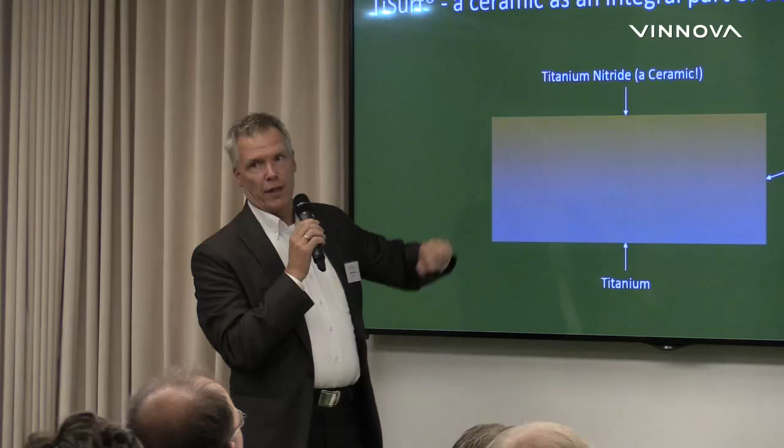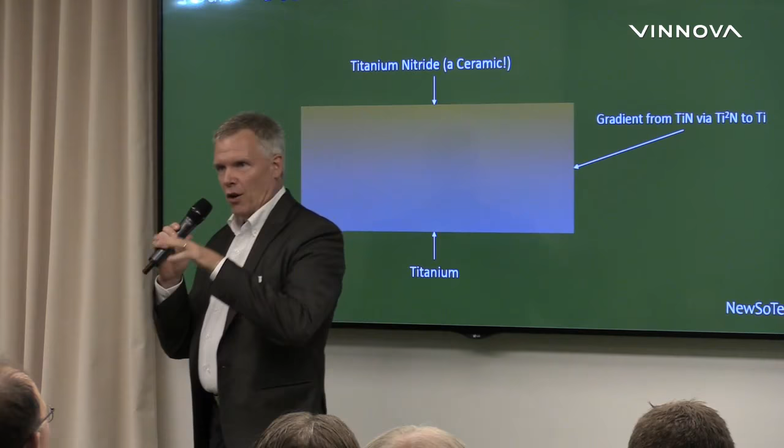The benefit of this is that we have methods to control the surface properties such that we can reduce friction to almost nothing. We increase the hardness from titanium being about 300 Vickers to about 3000. And the gradient in between, depending on how much flexibility you'd like in the component, we can stop short and have titanium nitride, which is about half, say 1500 hardness Vickers.

Having been around, most of you have seen titanium nitride on drill bits and so on. These titanium nitride coatings have been added with vapor deposition methodology, which means you have an adhesive issue. You don't have an adhesive issue here.

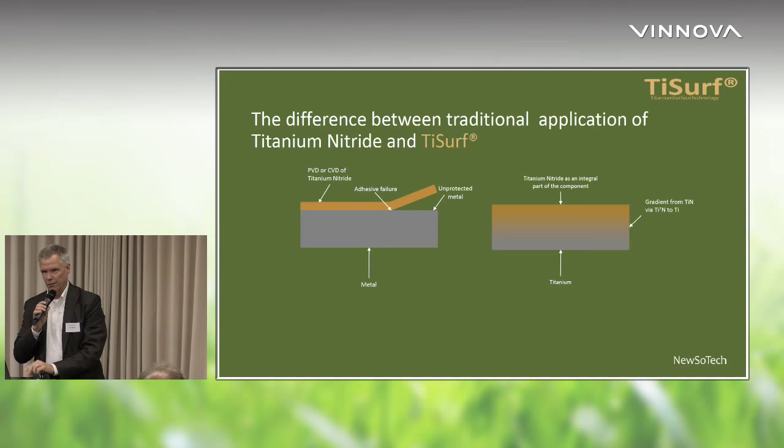So I can bend this into an L shape and the stuff will still remain - it won't flake. That's the key thing with this one: ultra-low friction, hard surface, essentially extending the life cycle of components that utilize this property. And once again, it will not peel off.

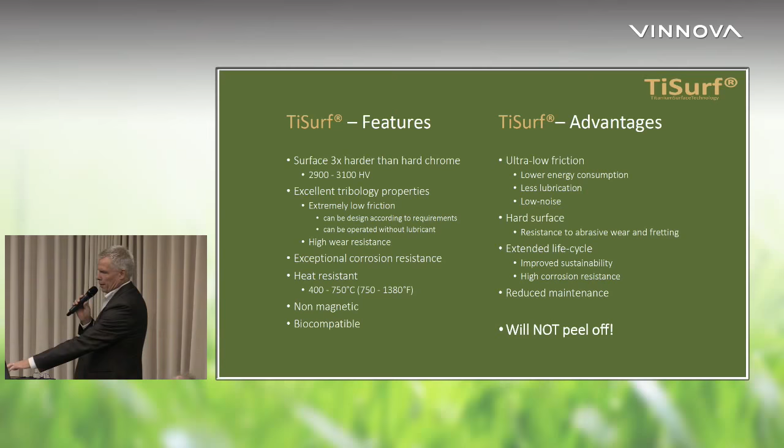We have some experience with this. For those of you interested in satellites, it's been used in satellites in this type of shape for transmission of communication - Cassini, the last one, and the one before that was Rosetta.

This is stuff we cannot really talk about, or could not talk about - Audi won Le Mans a number of times, and we reduced the friction in the turbocharger and the engine, and they had hydraulic suspension to outperform pretty much anyone in the race.

In 1996, hydraulic piston rods were installed in oil rigs in the North Sea. The piston rods work such that they keep the pipelines vertical, compensating for wave motion. The piston rods currently most used are made from steel and hard chrome, and they have a life cycle of about 12 to 18 months. These were installed in 1996 with a design life of 20 years, and we're still operating 2 years beyond design life.